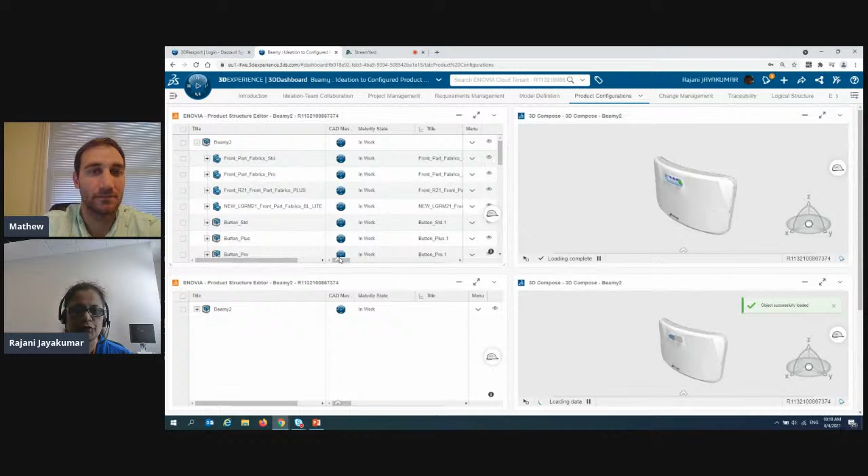I'm going to filter this one and show you two different configuration filters we've set up for the 2020 model and the 2021 model. Let me select that one and go to the configuration. This one is highlighting the 2021 model - okay, now it says 2020, I want to show you.

At the same time, I want to select the front cover with the 2020 light version of this model. Once I filter, validate the selections and then apply - now I have this white color.

You're not seeing a big difference here because I haven't filtered this one yet. So this one I want to filter - here I want to keep the 2021, and I want to select the light for that.

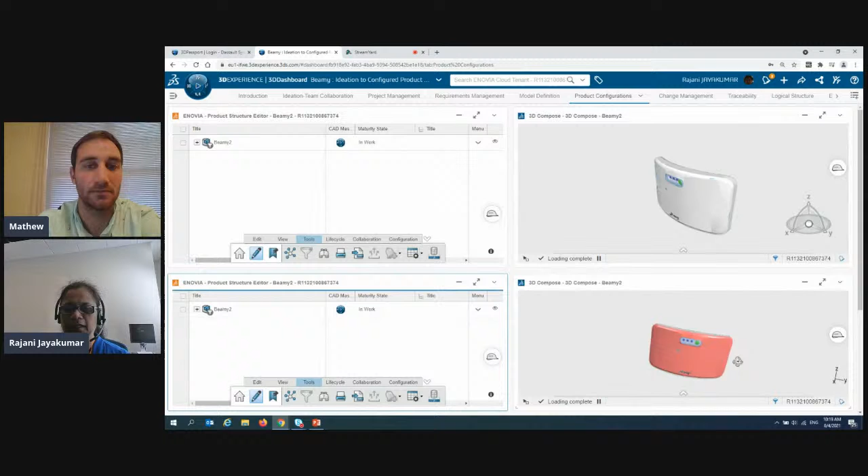So now we have the requirements collected from the ideation, and the design team is getting ready to work on the requirements. At the same time, they're working on this design activity - the 2020 model has a white front cover, and the 2021 model has this pink cover. This is very useful for designers to start working and make sure they're satisfying all the requirements, and they can monitor all the activities, see the relations and all that information here. So this tool is helping perform all that activity.

Now we would like to manage all the changes - for example, I'm going to show you the requirements-related changes here. Once this is all happening, you have different dashboards - you can create them, share them with the team. At the same time, you have different tabs, so based on your activity every day, you can create your own dashboard.

I have everything showing here, but individually, suppose you are working only on the configuration, you will have this tab and maybe a few other tabs. So based on your daily activities, you can create these tabs.

So here I wanted to show you how we can manage changes. In this story, there is an issue raised against a requirement missing a parameter for validation, but this requirement is already released.

So we need to go through the change action to revise the requirement and add the new parameter. Now we are working on assigning the change action to revise the requirement, and then we can assign it to a new person to work on this one. The change action is created.

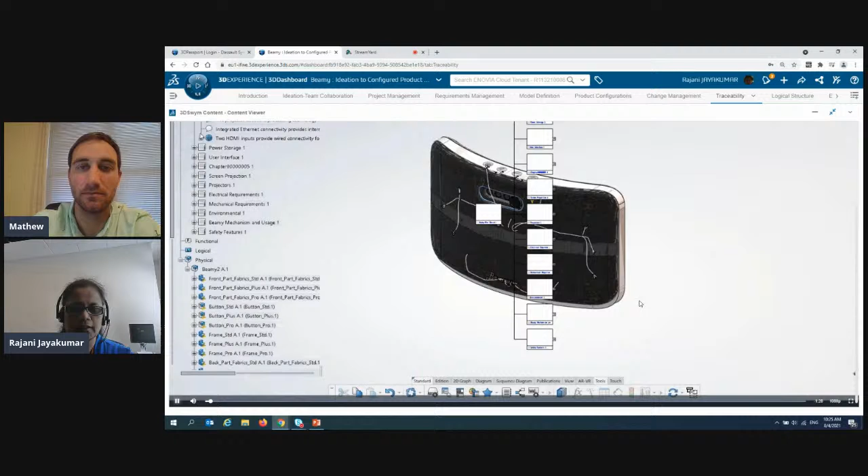I'm showing a little bit of this native application here. We can include the requirements, functional, logical, and physical. You can see the Beamy model, and at the same time all the requirements associated, all the requirement specifications. Also, if you have the functional and logical, you will see that in this layer, in this native client.

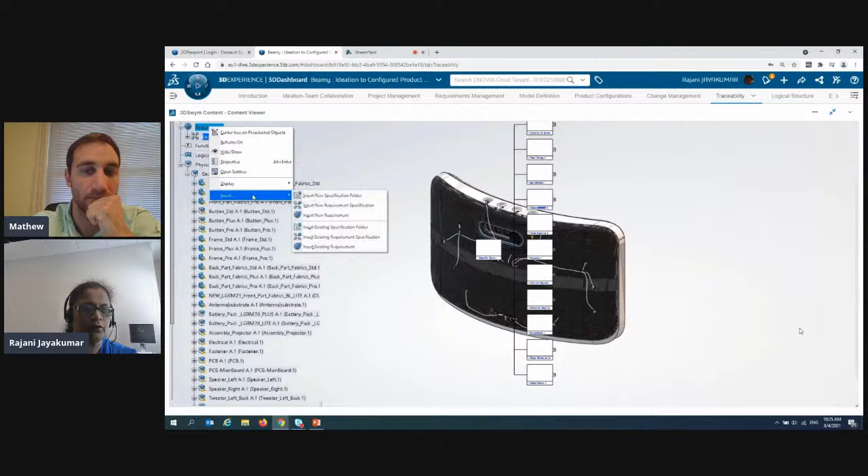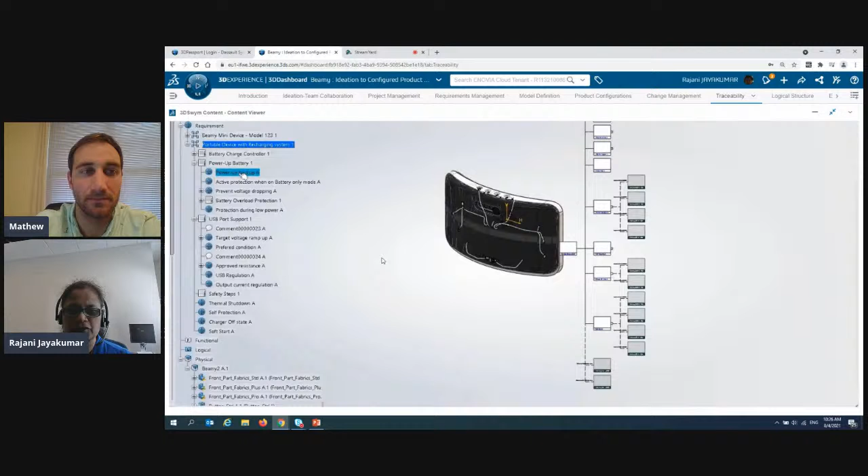Okay, so we can insert new requirements. Today we are going to highlight only the requirements related to activities. We can include new requirement specification and assign the links or satisfy all this in the content viewer. This traceability matrix is very helpful to assign requirements to a particular model definition or the physical product structure activity going on. We create implement relations so we know we are satisfying the requirements.

At the same time, here is another view of your traceability. In this view, you can see your requirement specification and what requirements are satisfied by, implemented by, which particular CAD model or model definition. You can see all that, and if you have variants and evolutions assigned, you will see that information here. This is very helpful to filter and review all your information.

Now in this view, you can see the links showing, and we can see how many requirements are connected or satisfied, and how many are not allocated to the models or model definition. You can view from here. The ones showing in orange or red color are not allocated to any model, and we would like to work on this. You can filter all that and assign it to a team member to work on those requirements.

Different views can be created from different perspectives and select all the information. You can review information, share it with your team members, and assign it to an external or internal team member to work on this activity.

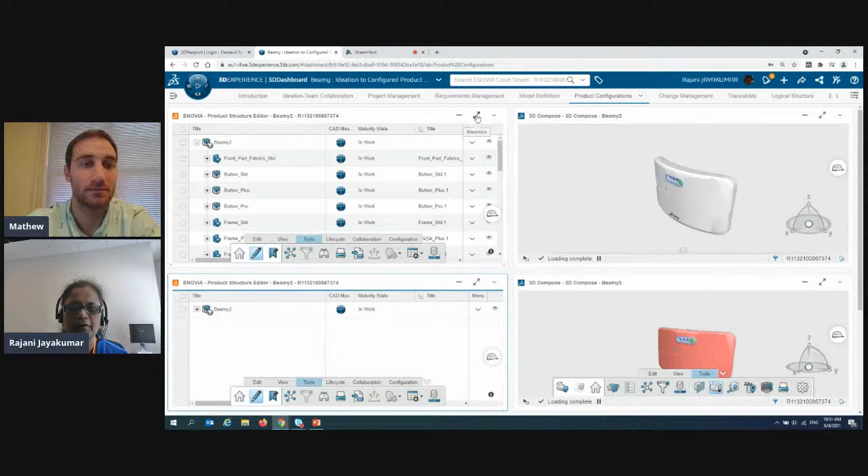Say, for example, the designer is getting ready with the design activity. Once they are working on the model, they don't have to wait for another application to load all that information. Once they log in, they can see what new requirements are coming in. If any requirements are changed, they can see the changes, everything available in this dashboard. So I just wanted to highlight a little bit on this one.

So these dashboards, or tabs, you can create your own dashboard, create different tabs, and here you can see you can add a new tab for a different view. Instead of having different tabs, you can organize it in one single tab also, just like what I'm showing here. So you can have multiple, but you will be scrolling up and down. It's all different, the way that you want to manage it.

There are a couple of things I mentioned earlier but did not get a chance to show you. I wanted to switch to a different dashboard where, with the help of our NetVibes tools, we can collect information from external sources. So we can pull information from, say for example, you are monitoring government regulations, standards, and so on. You can get feeds from different websites, different sources, and collect all the information and monitor here.

This could also monitor how your market, the Beamy market, is doing, and you can get the latest information. Say, for example, they are looking into adding new features, so you can actually speed up your product development and deliver to the market on time.